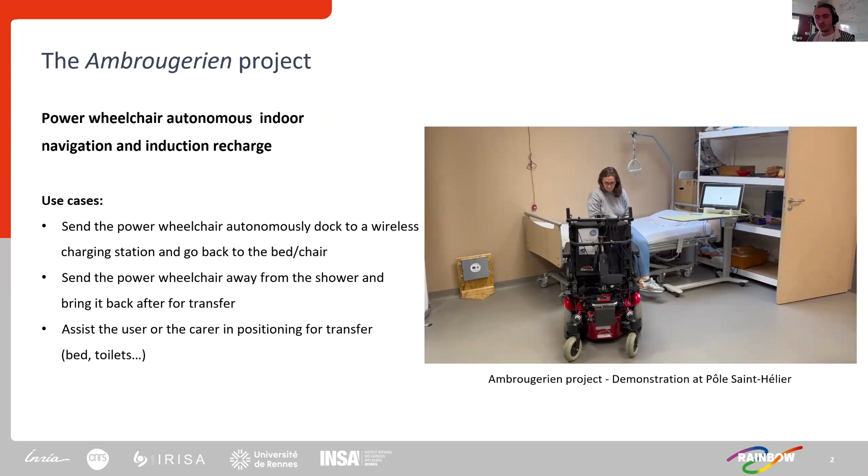For instance, you can think about sending the power wheelchair away from the shower of a user to avoid the water. And then when the user is finished with his shower, bring back the power wheelchair to proceed to the transfer. And you can imagine many different use cases that would help increasing the autonomy of a potential user. So this is what the Ambrougerien project and my PhD is about. So we want a safe navigation system for a power wheelchair.

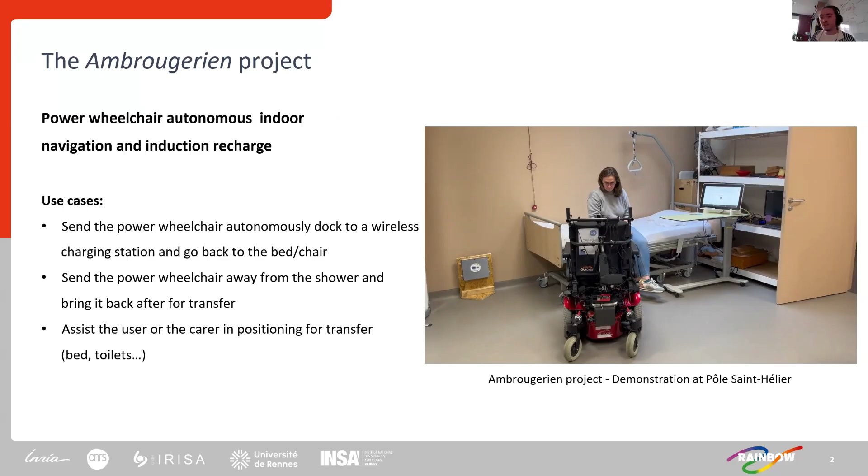So when we design a navigation system for a power wheelchair, we have some design considerations. In my PhD, we want to interface to commercially available power wheelchairs. We also want low cost and easy to install sensors for the acceptability of the user. And with these considerations, in my PhD, we are using ultra-wideband sensors for indoor positioning and coarse navigation, and time of flight infrared sensors for obstacle avoidance.

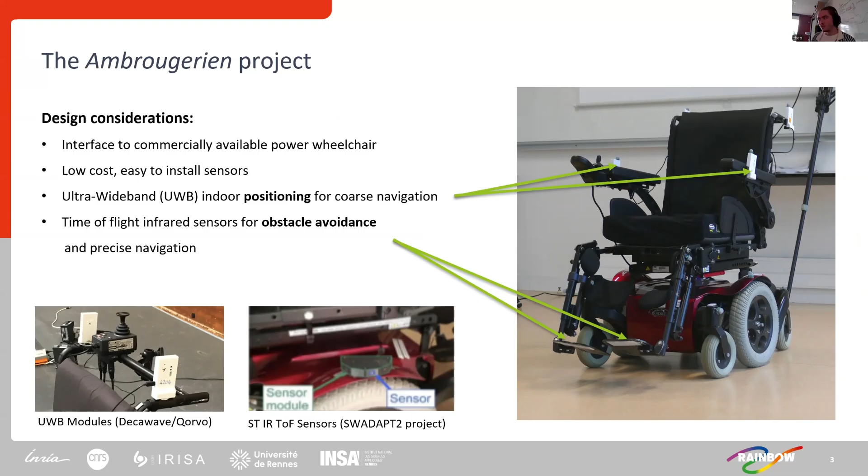And so how do you localize this tag? You use the distance measurement between the tag and all the anchors in your setup. And so how do we measure the distance between the tag and one anchor? There are several techniques, but in my PhD, we use sensors that leverage the two-way ranging technique. I'm just going to present a simplified scheme of the two-way ranging technique. Let's say that you have a node A that wants to measure its distance to a node B. Then it will send what's called a range request to the node B.

And the time taken by the signal to go from A to B is called the time of flight. Okay? And we want to measure this time of flight. Then after a certain time, the node B will send an answer to the node A. And again, the time taken by the signal to go from B to A is the time of flight. This response time, RT, is known. We also can measure the total round-trip time of the signal. And with this, we can compute the time of flight and then the range between the two nodes. So this is how we perform the distance measurement between our tag and the anchors in the setup.

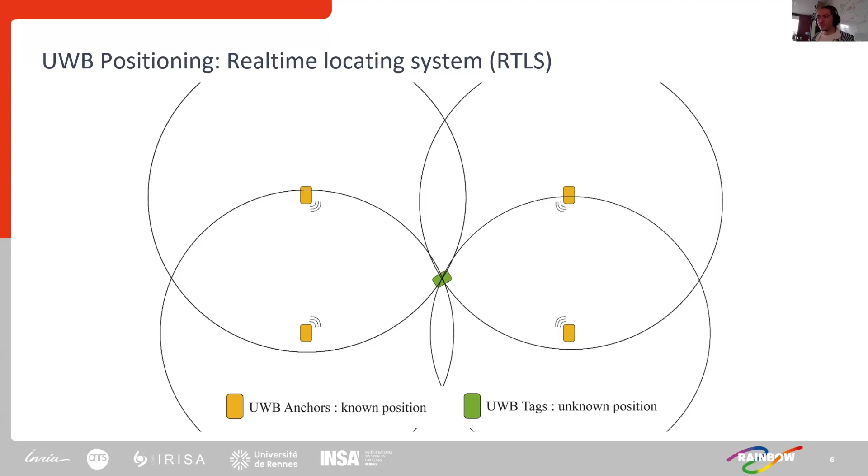But we are not interested in localizing a single tag. We want to estimate the pose, so the position and orientation of our power wheelchair. So the idea basically is to equip the power wheelchair with several tags, at least 2 for the orientation. And if you know the position of the tags with respect to the local frame attached to the power wheelchair, then you can estimate the pose of the power wheelchair using this ultra-wideband positioning system. Okay, so we have a way to estimate the pose of our power wheelchair.

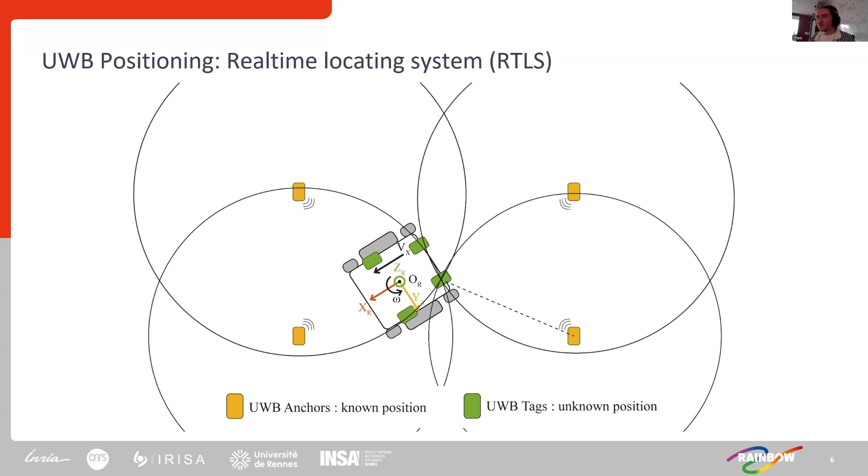But here I presented the case where the distance measurements are perfect. So the case of ideal sensors. I explained at the beginning of the presentation that to increase users' acceptability, we use low-cost sensors. And of course, low-cost sensors come with a lot of sources of error. So for instance, we have all the random noise. We have also systematic biases. So we are usually dealing with uncalibrated sensors.

Also due to the antenna pattern, the bias depends on the orientation of the sensor. Hence, it depends on the pose of the power wheelchair. There are many different biases that should be taken into account. So another source of error. And we also have what is called spurious measurements. So I did not say it earlier, but when you do a two-way ranging technique, you assume that the path followed by your signal to go from the tag to the anchor is the straight line between your tag and your anchor. And this is called the line of sight path.

But in a real scenario, you can have obstacles masking this line of sight path. So for instance, the obstacle can be a wall, it can be a furniture, it can be the power wheelchair itself. And when you have an obstacle masking the line of sight, then what you can measure is, for instance, a reflected signal. So this signal that is reflected on the wall, for instance. And then you will measure a distance that is greater than the actual distance between your tag and your anchor.

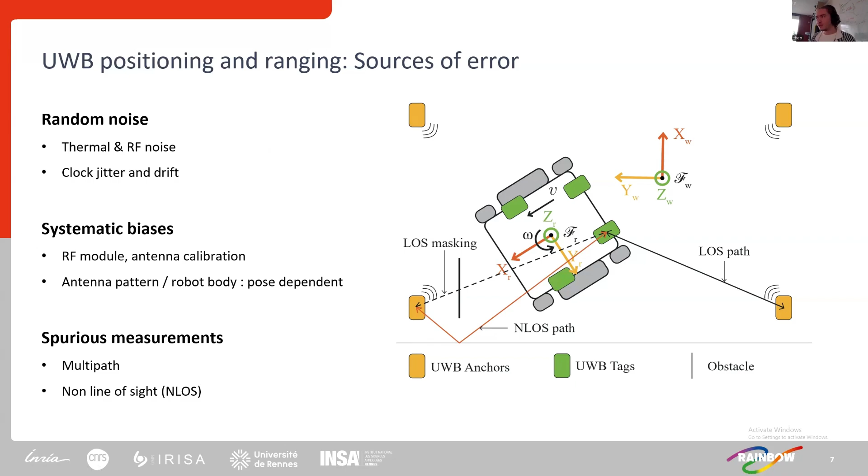So this is an interesting property when using ultra-wideband sensors. It is that we know that the errors coming from non-line of sight signal propagation will provide measured distances that are greater than the actual distance between the tag and the anchor. Okay, so we have all these sources of error, and what we want to do with this is to design a set membership power wheelchair pose estimation method that provides a confidence domain of the pose of the power wheelchair. So we want to provide a set of power wheelchair poses that are consistent with our uncertain measurements.

So again, when I'm talking about the pose of the power wheelchair, I'm talking about the position and the heading, so the orientation of the power wheelchair. And in this work, we assume no prior knowledge on the power wheelchair configuration. We have no idea where it is initially located and how it is initially oriented. And for this, the only thing that we have are our range measurements and this simple observation model. So the range between a pair of anchor and tag is the distance between the anchor and the tag plus a certain range measurement error that is unknown. And so you can see that this observation model depends on the pose of the power wheelchair.

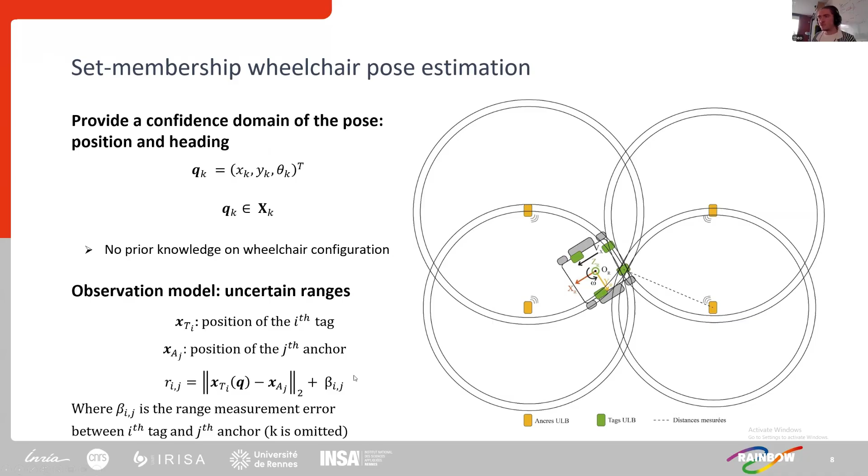Also, at the beginning of the presentation, I said that the position of the anchors are assumed to be known, but in reality, they are just coarsely estimated. So again, this introduces another bias that is difficult to identify. So we cannot reasonably use this data to provide a bounded error model for our ranging error.

So what we did was that we performed the data acquisition in a room. The room was equipped with a motion capture system, and it was also equipped with 4 ultra-wideband anchors, basically at the corners of the room. We used a real power wheelchair equipped with 4 tags, and the power wheelchair was manually driven inside the room. So the range measurements were recorded, and also the ground truth provided by the motion capture system.

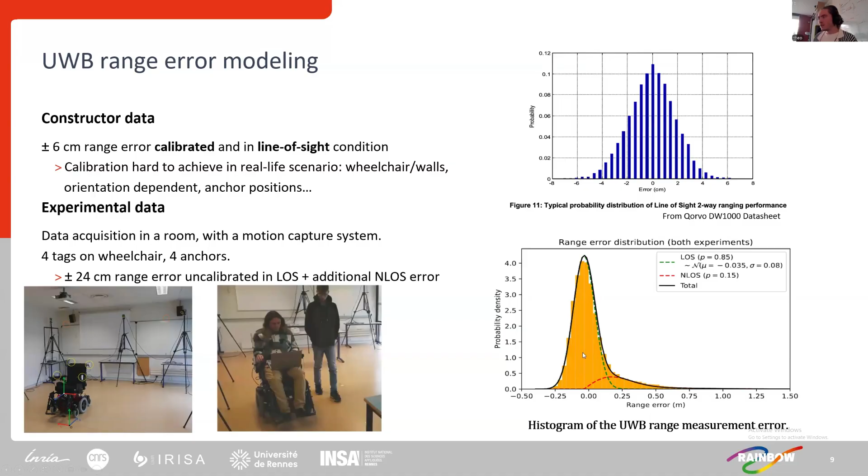And with this, we computed this histogram of ultra-wideband ranging measurement error. So you can see that it is not like the one provided by the constructor. So we have greater error, and some of them are also coming from non-line of sight signal conditions. Okay, so let's have a look at this histogram a bit more. We can clearly distinguish 2 parts on this histogram.

So you have this green part that corresponds to the ranging error coming from line of sight conditions. So basically in this part of the histogram, the ranging error can be modeled by a centered interval. It just means that each measurement error term between a tag and an anchor should belong to a certain interval. And then you have another part in the histogram, this red part that corresponds to the errors coming from a non-line of sight signal propagation.

And then, as I explained earlier, due to the positiveness of outliers coming from non-line of sight signal propagation, we know that the lower bound will remain satisfied, but the upper bound here will be violated because of the non-line of sight errors. Okay, so a thing that we could do to provide a robust positioning method would be to use a Q relaxed intersection scheme.

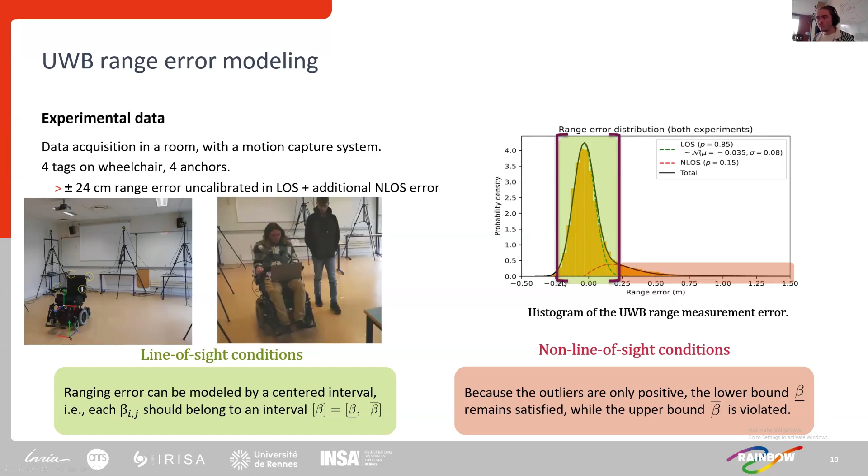But since we know that we have some positiveness on our outliers due to non-line of sight properties, what we can also do is to keep a single bound, just the bound that remains satisfied. So let's do this. We keep only the lower bound on the ranging error, and this defines for each pair of anchor tag a set of range upper bound constraints. And these constraints are almost always satisfied, as you can see here on this picture.

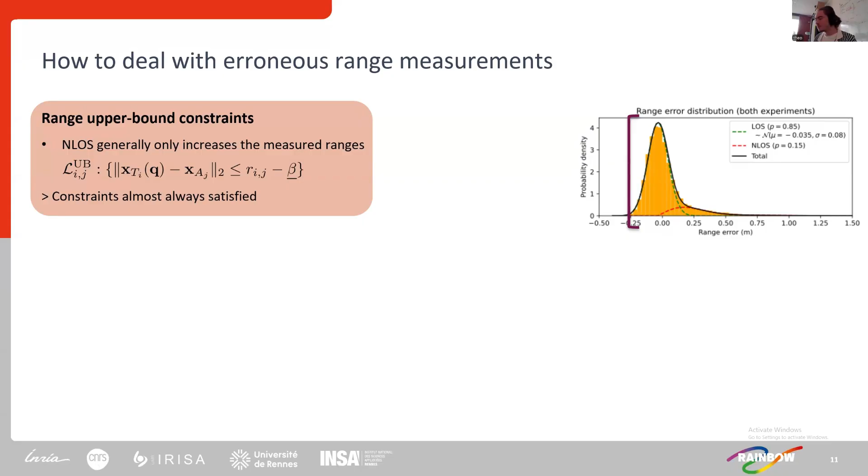So now I'm going to explain how this set of constraints works. And for this, we are first going to consider the case of an ideal sensor with perfect distance measurement. So basically, I have the measured distance between the anchor and the tag. And what does this constraint say? It just says that my tag is located inside this pink disk.

So the center of the disk is the anchor position, and the radius of the disk is the measured distance between the tag and the anchor. So I have not a lot of information here, but with my four anchors in my setup, I am located at the intersection of the four disks, and then I have again a unique solution for the position of my tag.

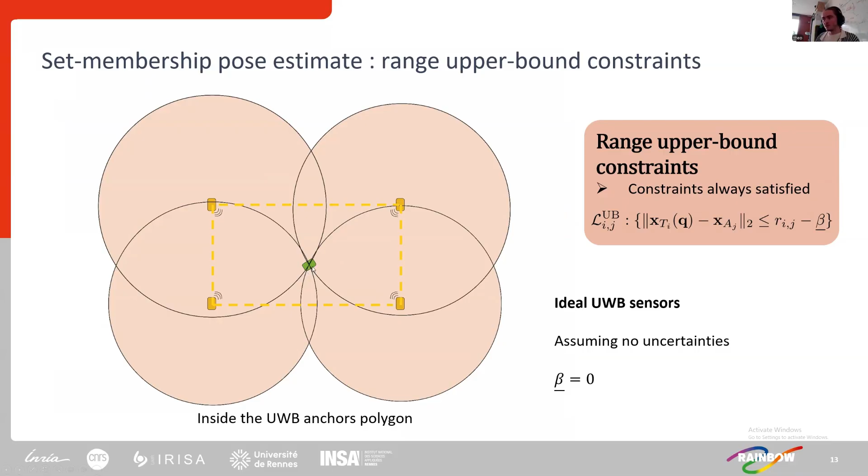And this is no longer the case when we exit the polygon defined by the ultra-wideband anchors. As you can see here, even though we are considering ideal sensors with no uncertainty, the solution here for the position of my tag is a set. So of course, if we use this set of constraints to provide a confidence domain outside the anchor's polygon, we will provide a too conservative confidence domain.

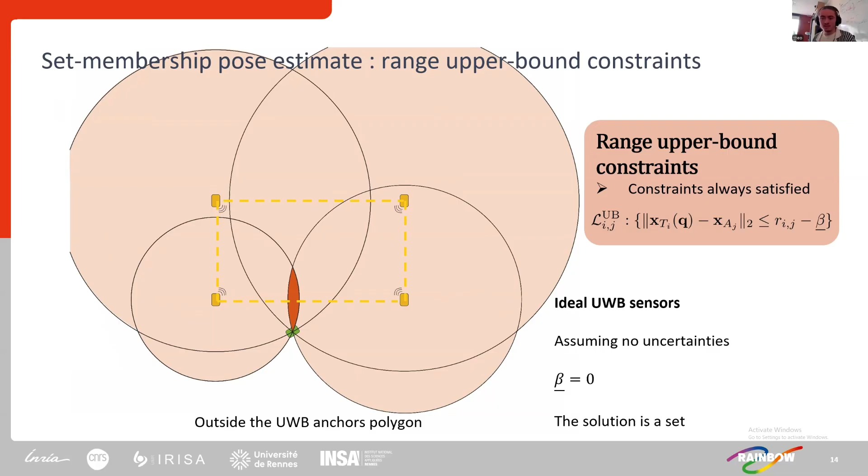But in a real life scenario, you usually install the anchors in the corners of your room. So it's a reasonable assumption that you will not exit the anchor's polygon boundary. So let's make this assumption in the following, and now let's consider the case of real sensors, with uncertainties. So of course, the higher the uncertainties, the higher the volume of the feasible position set. And it's getting worse as you approach the anchor's polygon boundary.

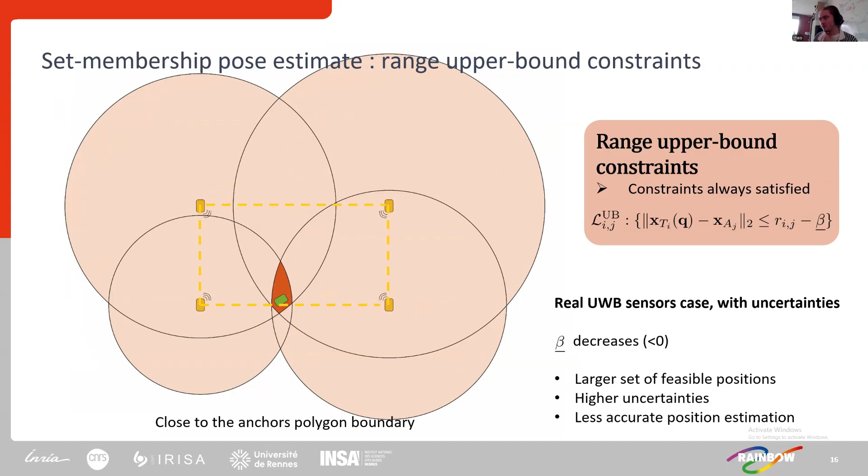Okay. And then from this set of constraints, we can define what is called a separator, SUB for range upper bound, and then use an algorithm such as the SIVIA algorithm to construct an inner and outer approximation of the solution set resulting from this set of constraints. Okay.

So here we have a way to provide a robust solution, to provide a confidence domain of the pose of our power wheelchair without using any Q-relaxed intersection scheme.

But just to continue this talk, if we want to extend this method to the entire geometric space, so outside the anchor's polygon boundary, or if we just want it to provide less conservative domains when we approach the anchor's polygon boundary, we can add another set of constraints.

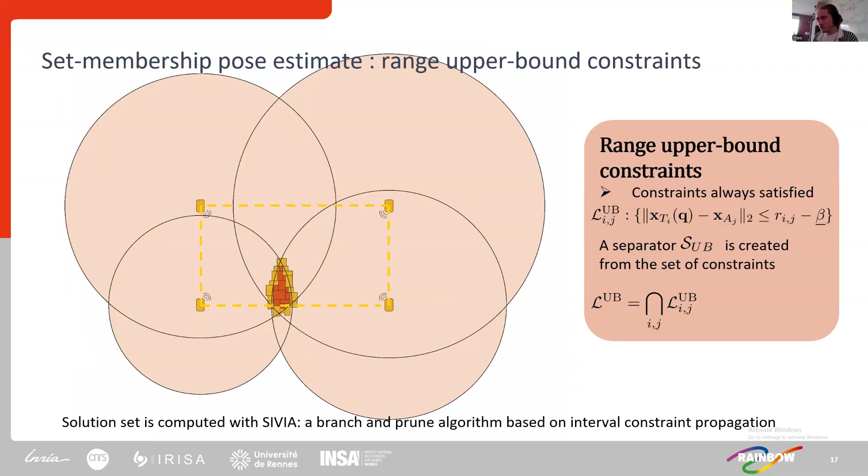So this time, if we keep only the ranging upper bound here, we can define the set of range lower bound constraints. So of course, this set of constraints are satisfied only in line of sight condition. As you can see here, they are violated with error coming from non-line of sight errors. Okay, so if you want to incorporate them in the positioning method, then we have to use some Q-relaxed intersection on this set of constraints.

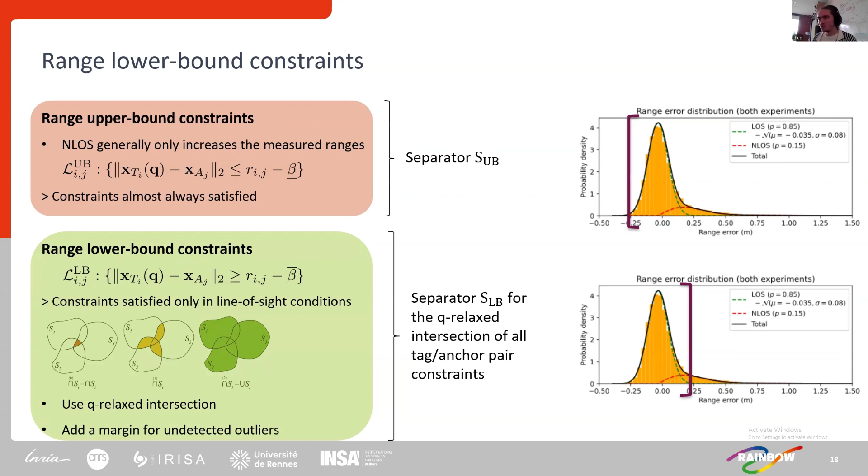So I'm not going into detail for this set of constraints, but again, we create a separator, SLB for lower bound, for the Q-relaxed intersection of all tag anchor pair constraints. And with this, we can define two different reliable positioning methods. One that will be called the SUB method, that only uses the separator for the set of range upper bound constraints, and the S method that uses a separator defined as the intersection of SUB and the separator for the Q-relaxed intersection of the set of range lower bound constraints.

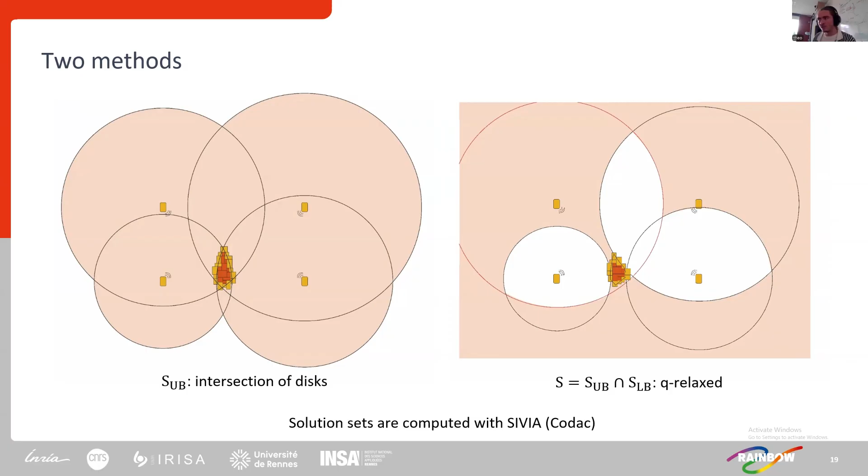Okay, and so I'm going to present some results on these two methods. And just so you know, the solution sets are here computed with the SIVIA algorithm using the Codac library. Okay, so if you remember at the beginning of the presentation, we saw the power wheelchair inside a room, and I told you that during the experiment with the motion capture system, the power wheelchair was manually driven using its joystick inside the room. And so on the right, you can see in red the path followed by the power wheelchair during this experiment. You can see the anchors in the room.

Okay, and what I'm going to present here are some confidence domains, so outer subpavings computed with the SIVIA algorithm, with the SUB method in orange and the S method in green. And I'm going to present some results for two different poses during the experiment: the pose A, that is far from the anchor's polygon boundary, and the pose B, that is close to the anchor's polygon boundary.

So when we are far from the polygon, you can see that the SUB method provides almost identical confidence domain as the one provided by the S method. So this shows that when we are far from the polygon boundary, the set of range upper bound constraints provides good results, even if we are not using any Q-relaxed intersection scheme.

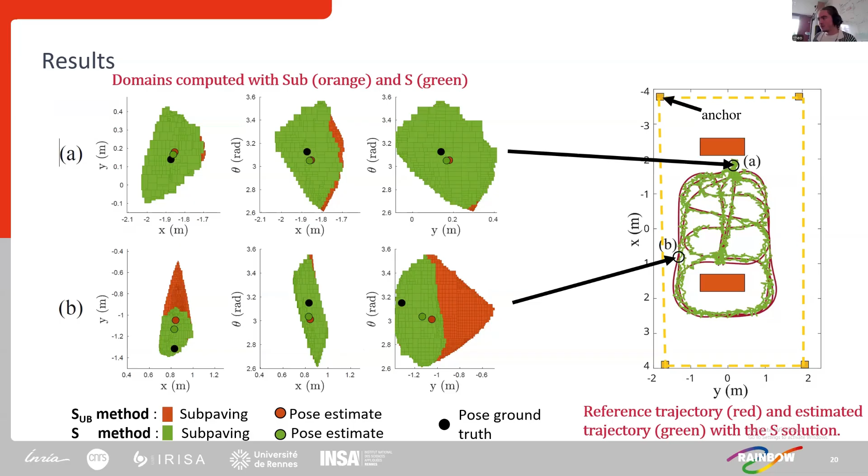Then the next thing that we did was to assess the reliability of our interval methods by verifying for each measurement epoch if the computed confidence domain contains the pose ground truth provided by the motion capture system. And so here I present some results of integrity over the whole data set recorded during the experiment. As you can see, the SUB method provides slightly better integrity results than the S method, but this is normal because we just added more constraints for the S method.

But what is really interesting here is that we obtained good integrity results despite the fact that there is no Q-relaxed intersection in the SUB method. The robustness of the method is inherent to the constraint formulation. So we used the positiveness of our outliers to provide a robust method without Q-relaxed intersection.

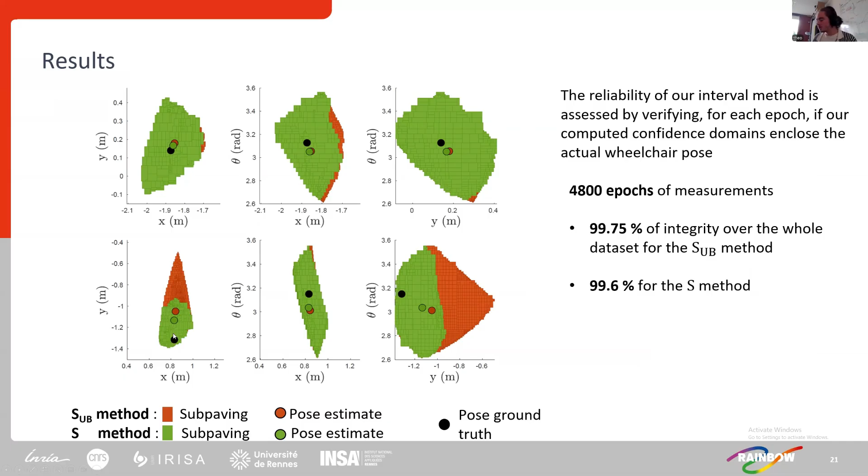And then you can also see on this picture some pose estimates. What we did was take the centroid of all subpaving boxes as a pose estimate for the power wheelchair, and then we compared it with the pose ground truth. And here I present some cumulative distribution function for the planimetric error for the two methods, so the S method in green and the SUB method in orange.

So again, as expected, the S method provides a slightly better accuracy result than the SUB method because the accuracy is increased when the power wheelchair is close to the anchor's polygon boundary. But for the two methods, we have a sufficient accuracy result for our application purpose. That is the coarse navigation of a power wheelchair.

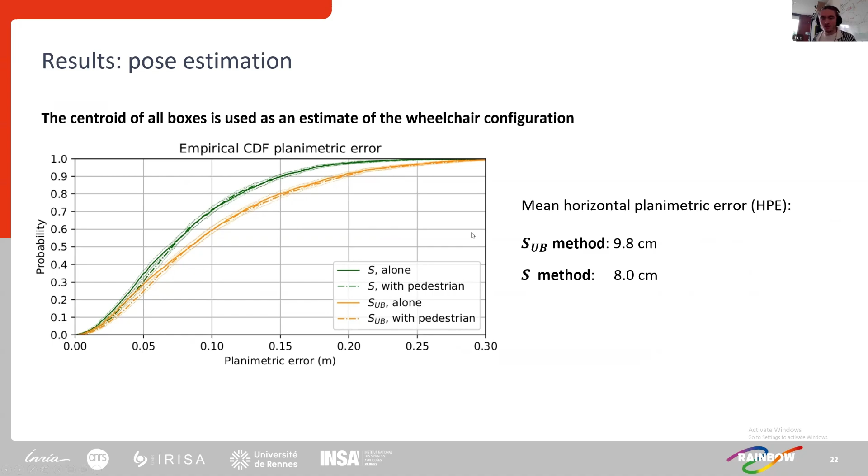Okay. So to summarize the first part of this presentation, I presented a set membership ultra-wideband-based reliable positioning method that provides consistent pose domain and sufficient pose estimation accuracy for coarse navigation of a power wheelchair. So we have seen that within the anchor's polygon, we can obtain a robust solution without using Q-relaxed intersection, just using the positiveness of outliers coming from non-line of sight signal propagation. And we have seen that we could extend this approach to the entire geometric space using a set of Q-relaxed constraints that are verified only under line of sight conditions.

Okay. So the confidence domain provided by this method could be used, for instance, to focus the initialization step of a localization method that needs a good initial guess, for instance, a particle filter. But the next thing that we are going to ask in this second part of the presentation is, can we design a power wheelchair control law that explicitly accounts for pose estimation uncertainties?

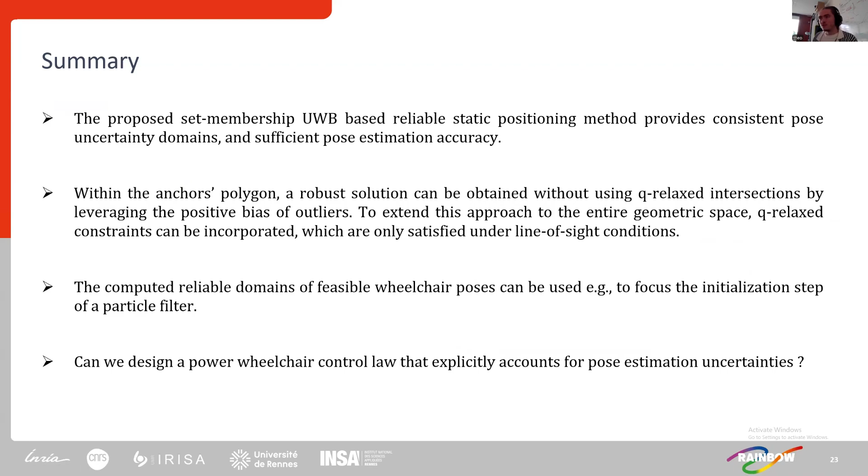So why will this be interesting? This is because, if I recall our goal here, we want to control the power wheelchair to a target pose while ensuring robust obstacle avoidance. And so if we want to ensure robust obstacle avoidance, it may be a good idea to take into account the uncertainty in the pose estimation of the power wheelchair.

So in this preliminary work, we are going to make some assumptions. First, the obstacles are static. There are no dynamic obstacles such as pedestrians. The obstacle positions are assumed to be known. And we have a pose estimation method that provides confidence domains of the pose of the power wheelchair, for instance, the one I presented earlier.

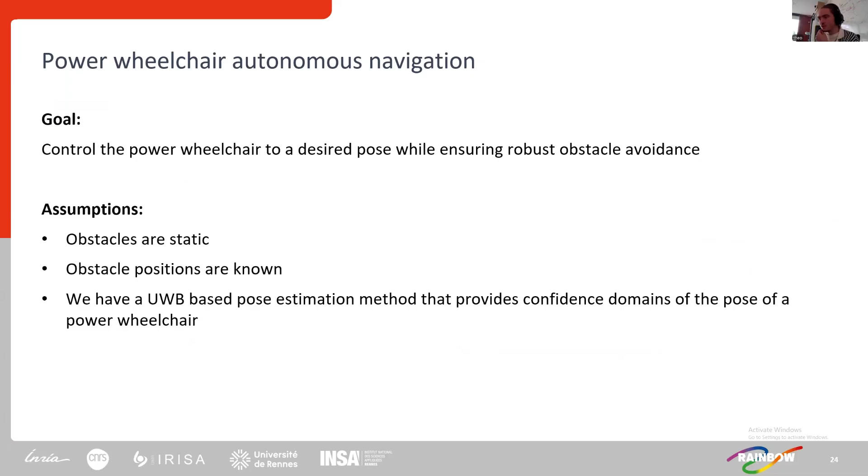Okay. So we want to do power wheelchair control. For those who may not be familiar with control, I will just summarize what we want to do. We have an estimate of the pose, which comes from what I presented earlier, for instance. You have your ultra-wideband measurements, and then a block that uses these measurements to provide a pose estimate. This is what I presented earlier for the robust positioning method.

Then you also have your target pose. For instance, it can be a pose next to the bed of a user for a transfer. This defines an error between your target pose and your currently estimated pose. Now the thing we are going to focus on is this controller block. The idea is to compute the control vector, composed of the linear velocity and angular velocity, that we want to apply to the power wheelchair to make this error converge to 0. So we want to design this controller block.

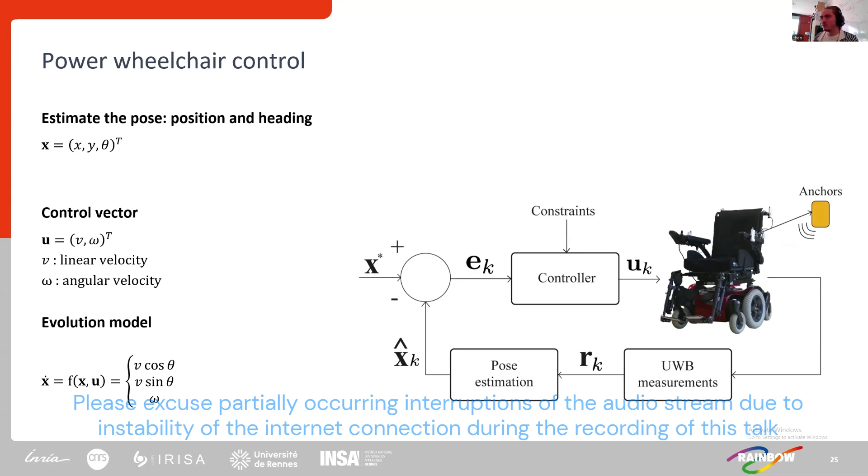Okay. So, typical problem formulation. Basically, you use the evolution model to optimize future control actions to obtain the best performance of the constrained system. The idea is to minimize a cost function. You have constraints on your control input and the predicted states, maybe the collision avoidance constraints, constraints on the predicted control for user comfort, for instance, the linear velocity of your platform.

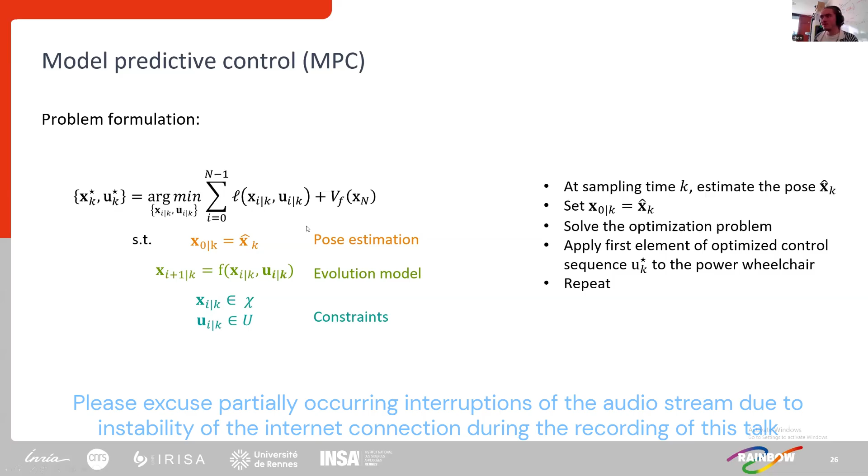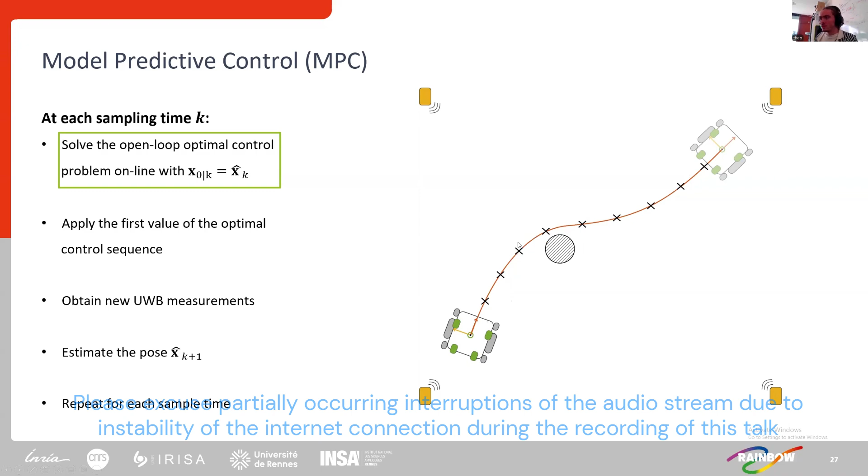For instance, this is the solution returned by the NMPC resolution. This is the predicted trajectory, and you can see the obstacle avoided by the optimized control. Because the model differs a little bit from reality, you then obtain a new measurement of the current pose of your power wheelchair. This is repeated for each measurement.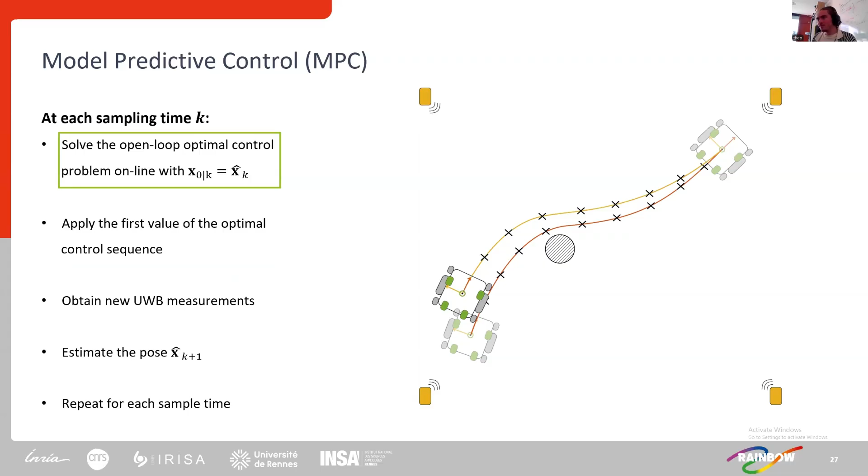So we, the NMPC, apply the first value until hopefully we... okay. But it's perfect. But no, we have error in our pose. Okay, here depicted in black and orange. So if the NMPC...

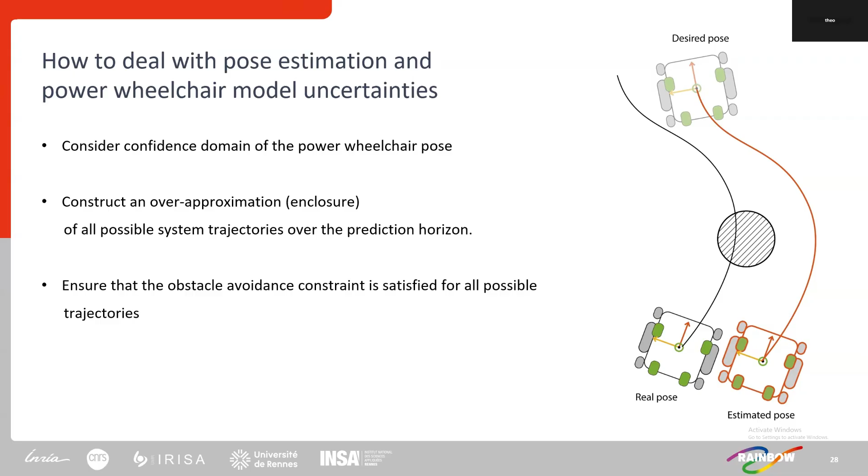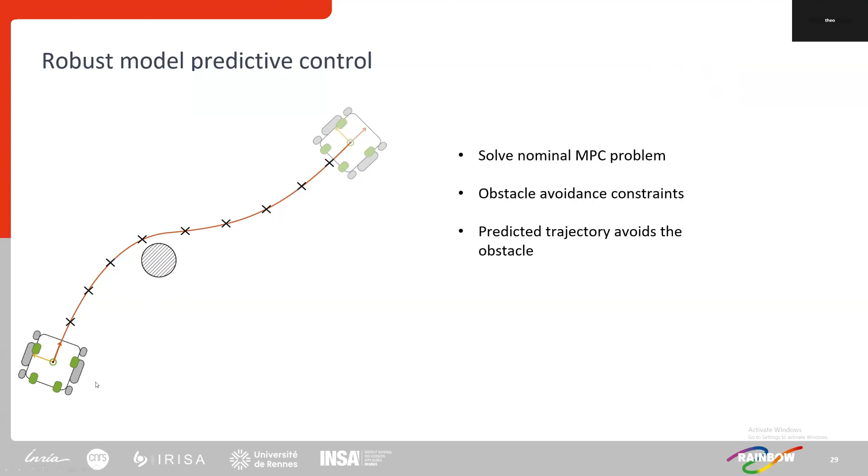Okay, so let's see a bit how this is going to work. So we have the target pose here, the obstacle here that we want to avoid. And first, we just solve the nominal NMPC problem with the obstacle avoidance, a predicted trajectory that we can obtain. Okay, but this is the estimated wheelchair pose. But in reality, all we know is the power wheelchair lies in this box of poses consistent with the uncertain measurements. Then from the NMPC solution, you have this optimized control.

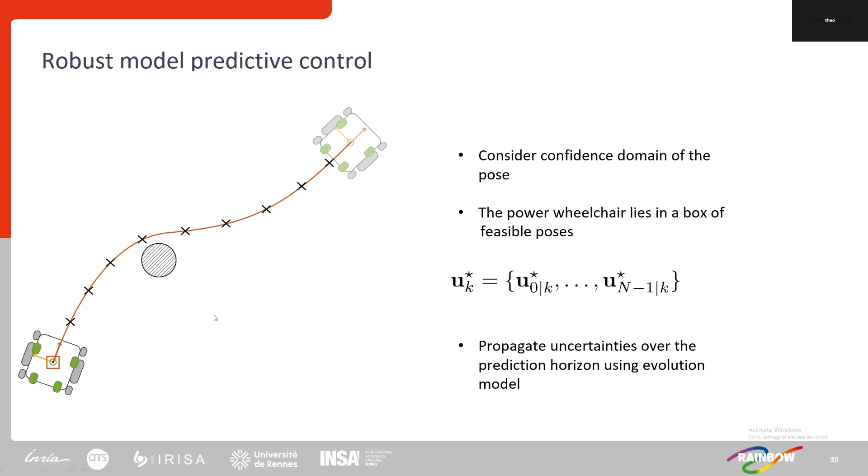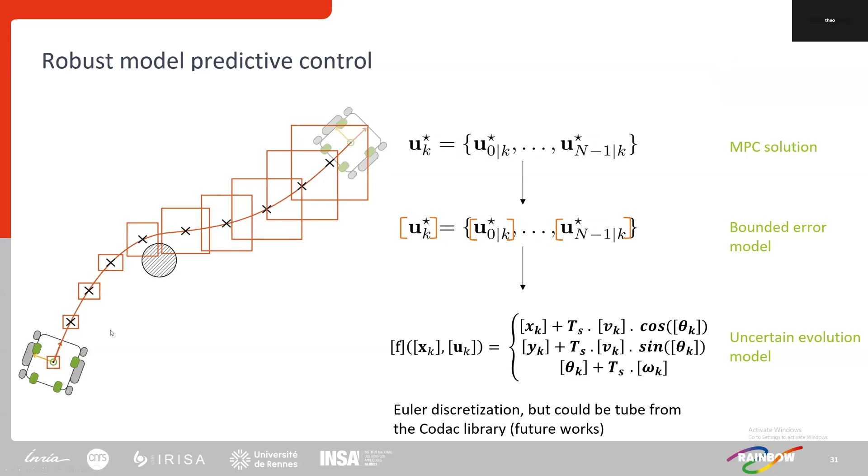Okay, and so the idea is to propagate the uncertainties over the prediction horizon using the model. Okay, so let's do this. So we have the optimized control sequence. We have some bounded error model for this. Then using the uncertain evolution model, the uncertainties over the prediction horizon. Okay, we can compute an enclosure of all feasible trajectories over the horizon. And here we can see that the predicted uncertain trajectory collides with the obstacle. Okay, so the constraint is not robustly satisfied.

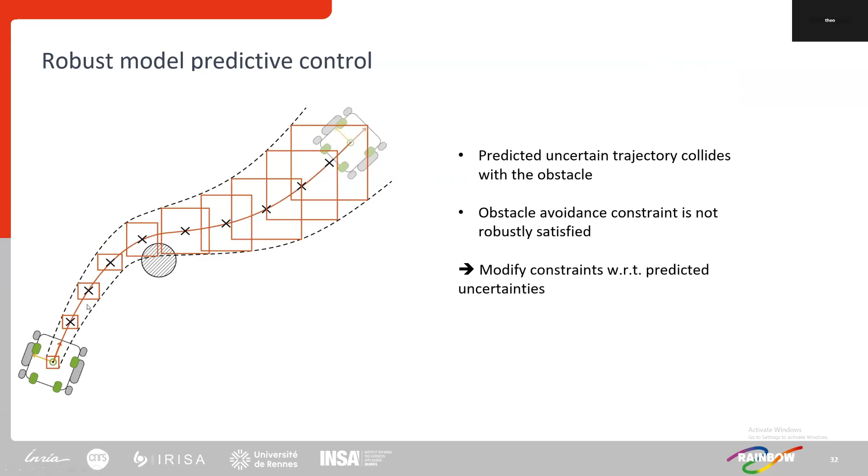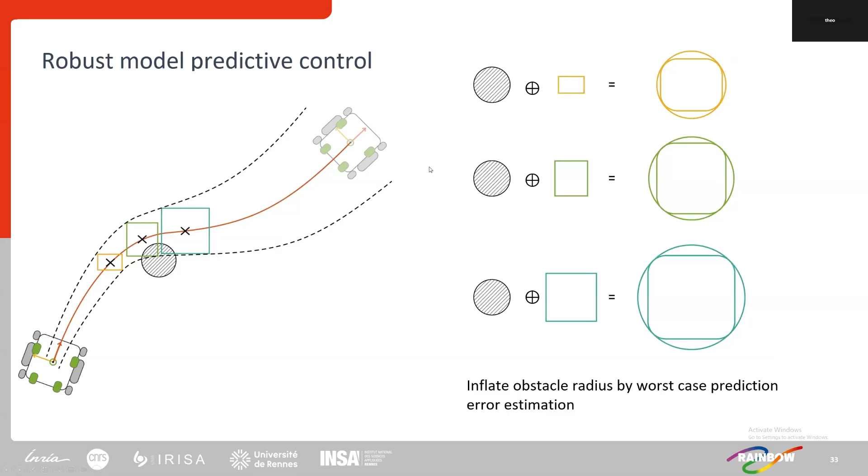So the idea is to modify the constraints. Okay, so of course we have to do this for the uncertainty boxes over the prediction horizon. Just for the example, I'm going to put these three boxes next to the obstacle. And so basically we inflate the obstacle to take into account the predicted uncertainty on our prediction horizon. Okay, so this will be the inflated obstacle, but still to keep things simple, we are going to over-approximate this inflated obstacle by a circle. Okay. And so now is to solve again the NMPC problem with updated constraints to take into account the predicted uncertainties.

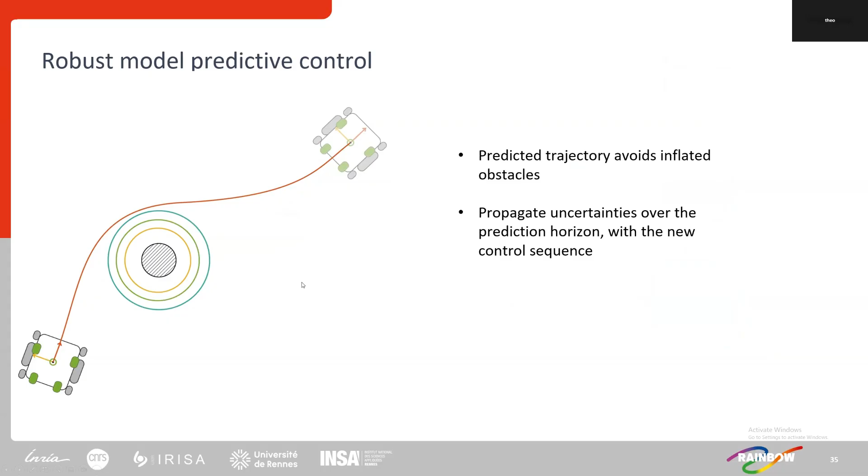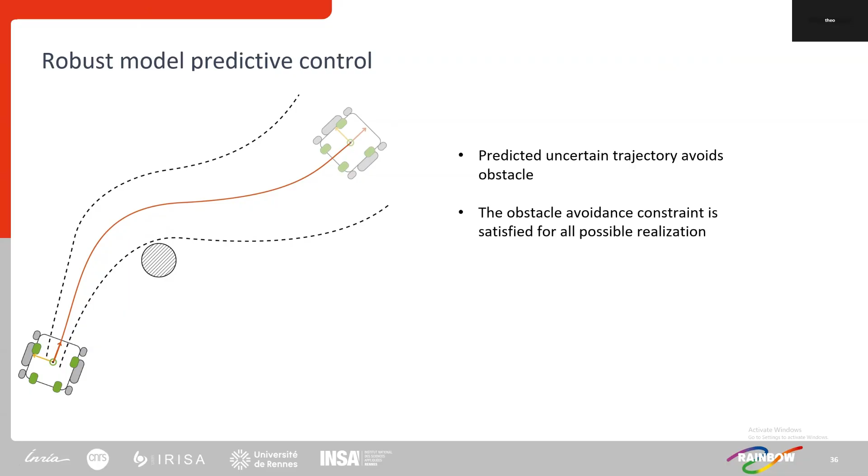And so now, if the solver finds a solution, then the predicted trajectory avoids the inflated obstacles, and then you can keep going, predict the uncertain trajectory over the prediction horizon, and then you just have to check if the predicted uncertain trajectory collides with the obstacle or not. So if it does not collide with the obstacle, then the obstacle avoidance constraint is robustly satisfied, and you can apply the first value of the optimized control sequence. And if the uncertain predicted trajectory still collides with the obstacle, then you can keep repeating this process. Okay, and then you can continue to do this until you converge to the target pose. Okay, so this was a simple example.

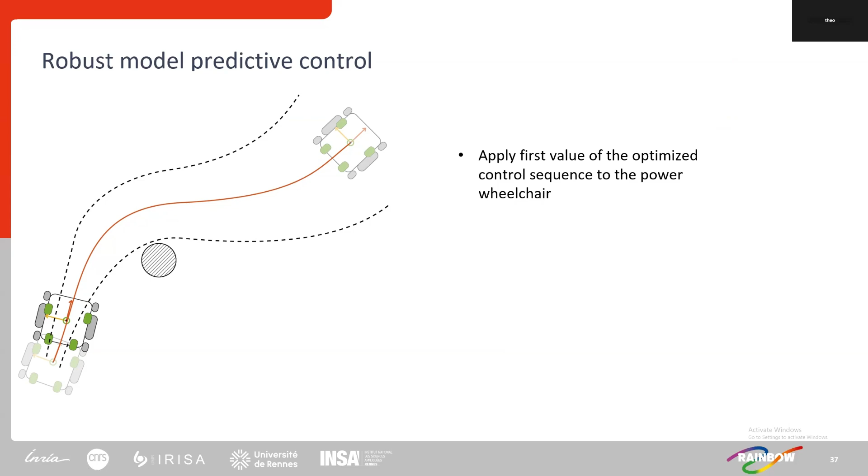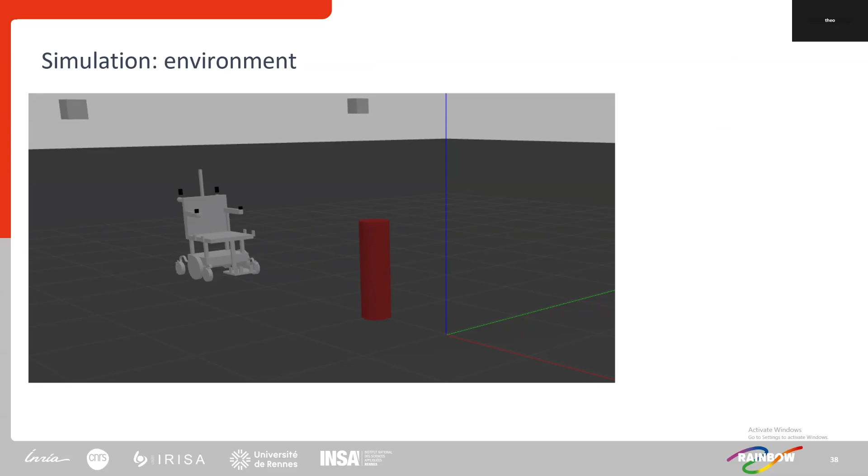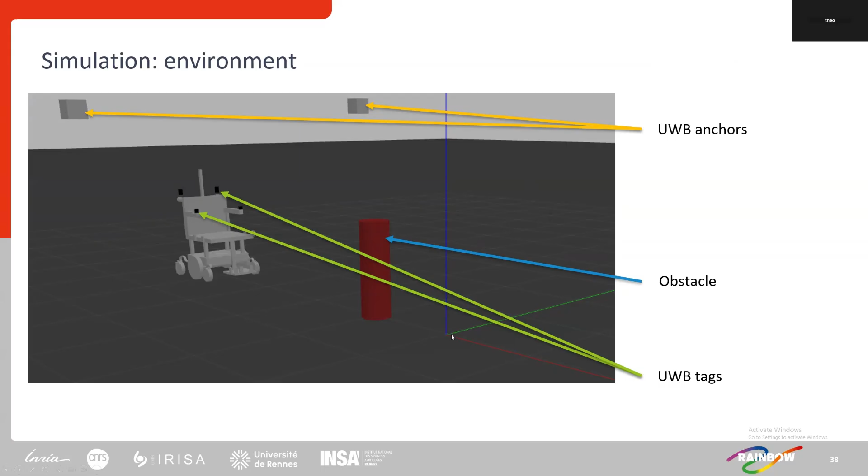And now I'm going to present some very preliminary results on this work, in simulation. So this is the simulation environment. We have a simulated power wheelchair equipped with 4 tags. There are 4 anchors in the simulation world. We have 1 obstacle, and we want to drive the power wheelchair to the origin. Okay, and I'm presenting this for the robust NMPC controller with the updated constraints on the left, and on the right, an NMPC that does not take into account the pose estimation uncertainty. And you can see that on the right, the power wheelchair collides with the obstacle, and it is not the case with the robust NMPC controller that uses the predicted uncertainties to inflate the obstacle.

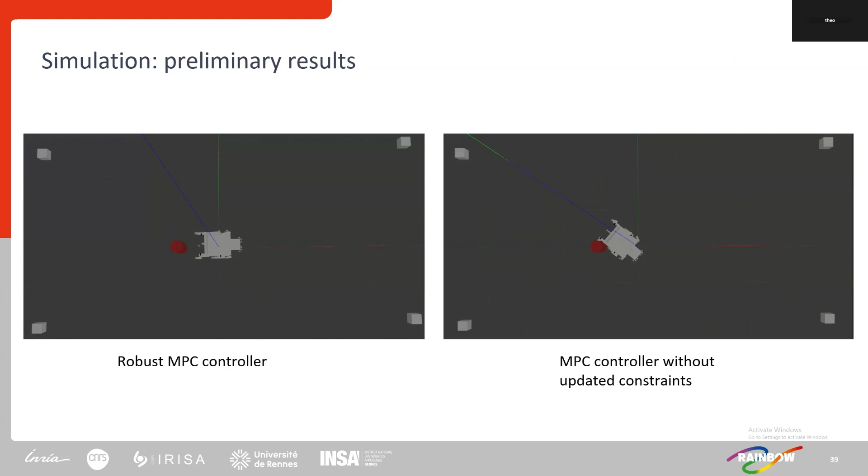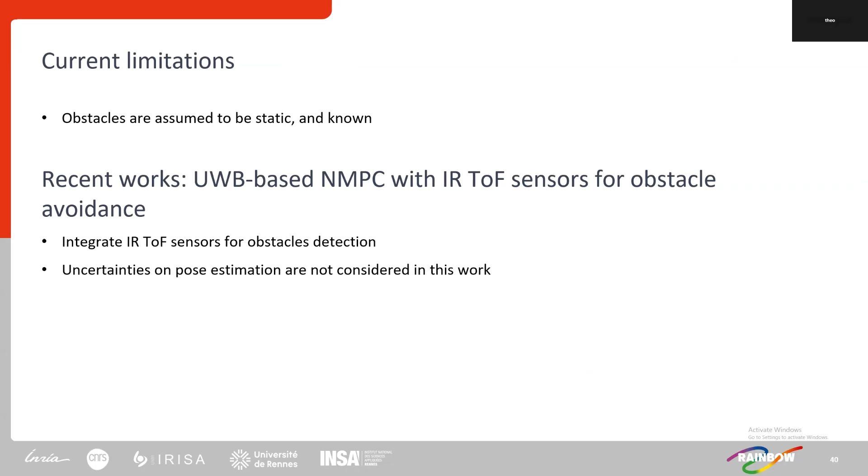Okay, so these are very preliminary results. Of course it has limitations. The obstacles are assumed to be static, but most importantly, their positions are assumed to be known. And yeah, this I think is a drawback. So in recent works during my PhD, we designed an ultra-wideband-based non-linear model predictive controller using the infrared time-of-flight sensors I presented at the beginning of the presentation for obstacle avoidance. So in this work, we integrated the time-of-flight sensors for obstacle detection. I'm going to present some results, but just so you know, the uncertainties on the pose estimation are not considered in this work.

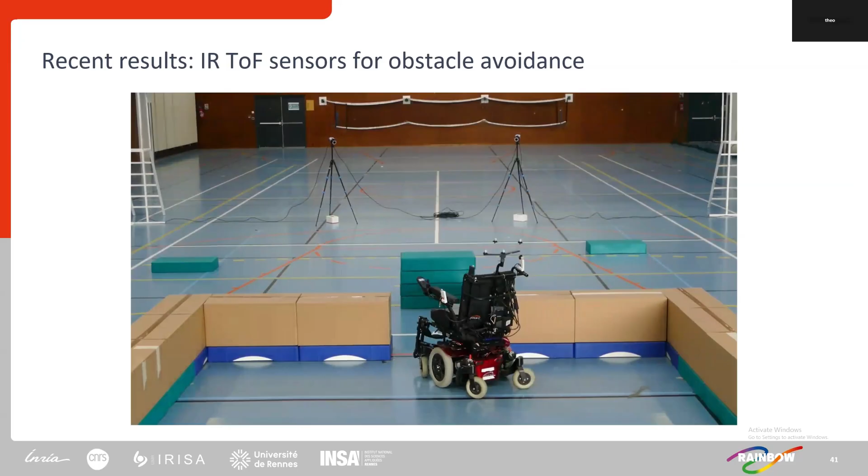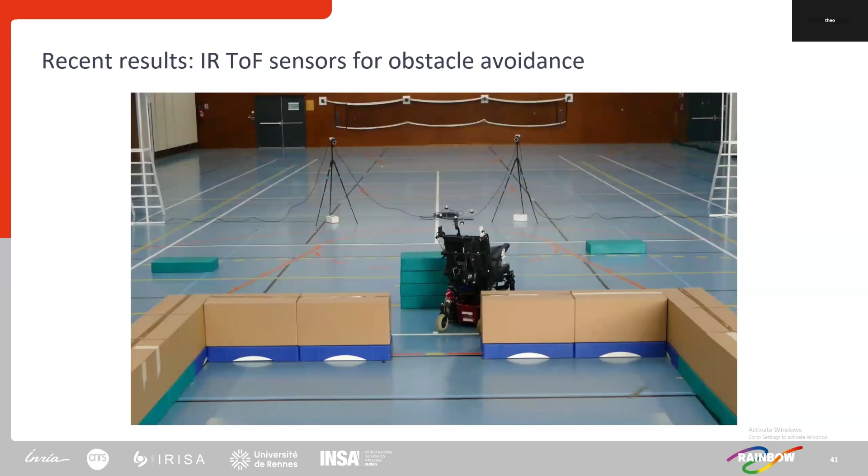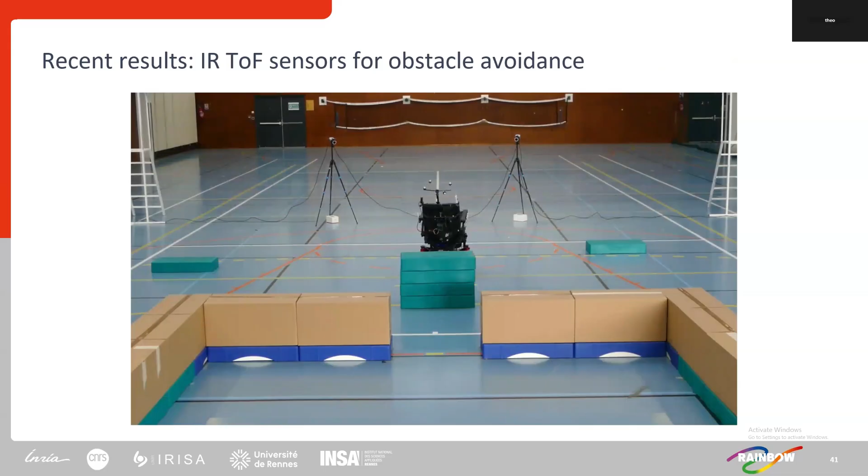Okay, so this is some result that we very recently obtained. Here you have the power wheelchair equipped with the tags and the infrared time-of-flight sensors that has to pass this very narrow door. The obstacles are detected using the infrared time-of-flight sensors. And you can see that it managed to pass this narrow door and avoid the steps in a good way. It has to reach the target pose behind the pile of steps. Okay, so this is an example of the work we have done recently.

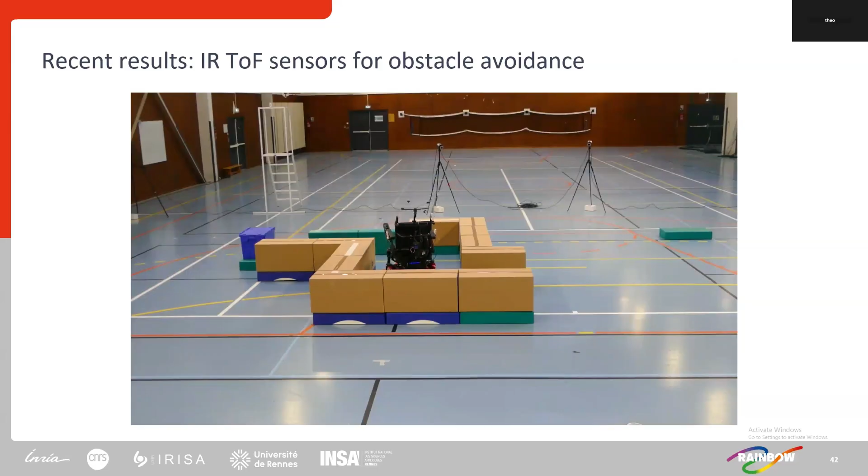Another example is this one. So the power wheelchair has to navigate in a really cluttered environment. Maybe on the video you don't see well, but it's a very cluttered environment. Even for a human in the power wheelchair with the joystick, it's so difficult to navigate here. But still, the power wheelchair may navigate in this cluttered environment and reach the target pose.

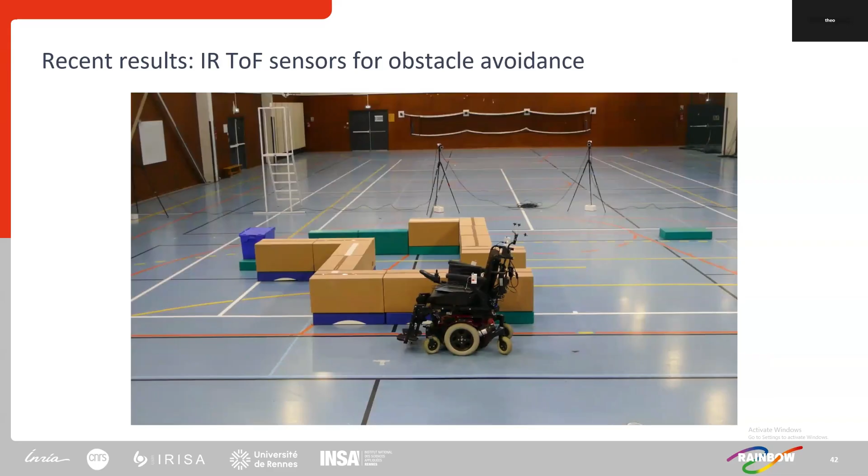Okay. But as I said, here there is no pose estimation uncertainty taken into account. There is no uncertainty on the infrared time-of-flight sensor measurements taken into account. And so the future works in the next year of my PhD will combine both approaches to design a robust NMPC-based navigation system for power wheelchairs in a cluttered environment.

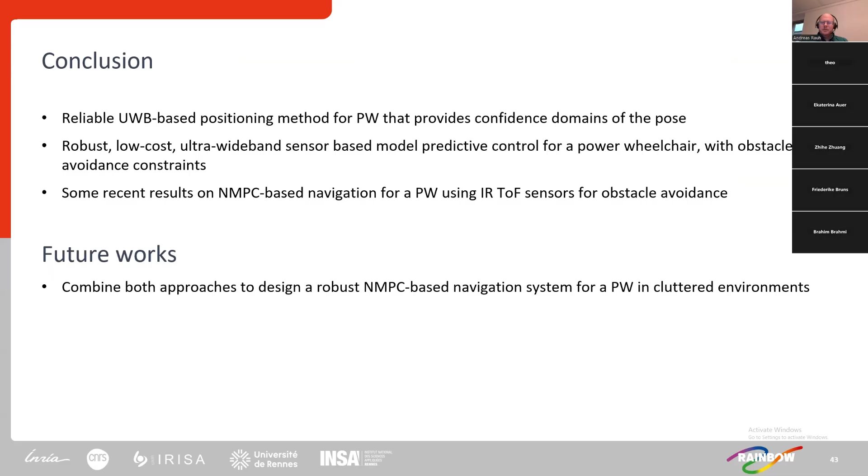Okay, and to conclude this presentation, I presented a reliable ultra-wideband-based positioning method for power wheelchairs that provides a confidence domain of the pose of the power wheelchair. And then I presented a way of using these confidence domains to design a robust, low-cost, ultra-wideband sensor-based model predictive control with obstacle avoidance constraints. And I also presented some recent results on NMPC-based navigation using the infrared time-of-flight sensor for obstacle detection and avoidance.